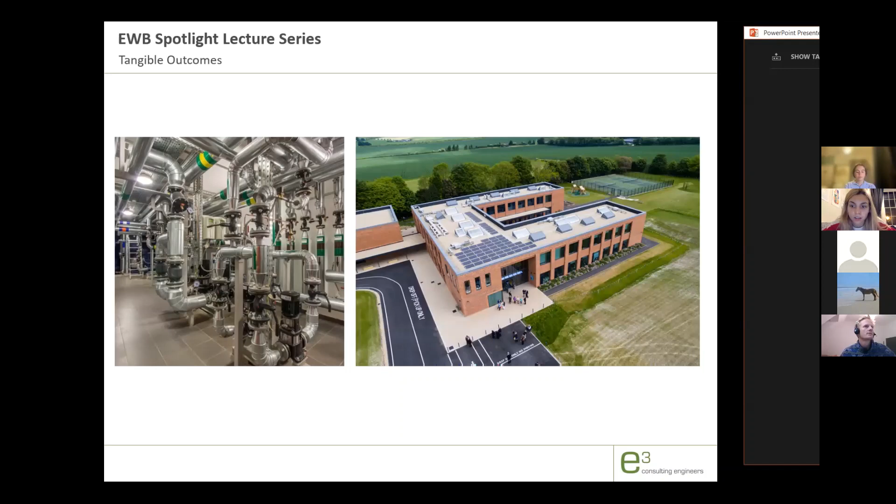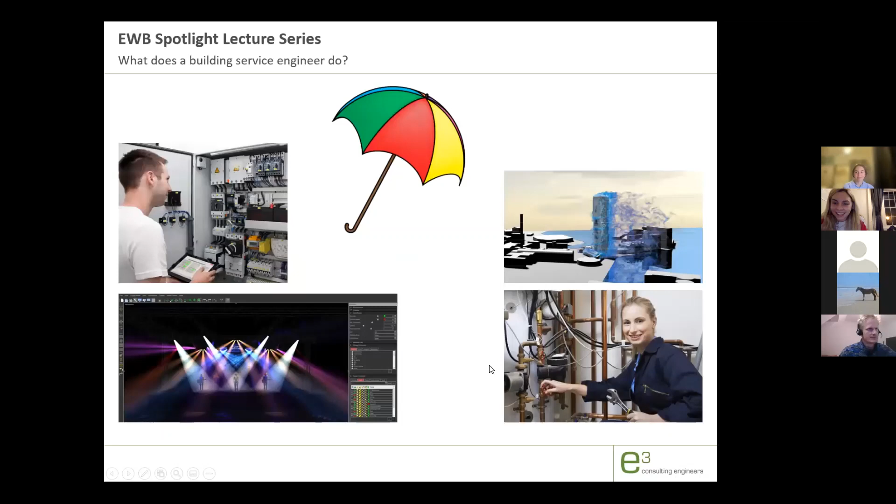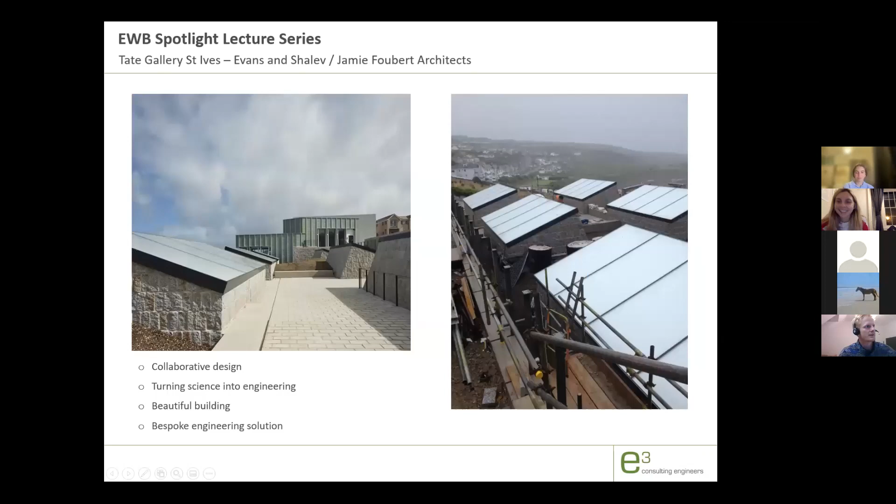All right, here we are, I think. Yeah. Right, fine. That's not going to ruin my flow at all, is it?

So the magical light. So what does that mean? It's heavily in the briefing process for the building. It's often mentioned by locals in the area. It's mentioned by tourists and probably by most people who travel there. They come back talking about this natural magical quality of the light.

And I suppose I felt it. I'm not that cold of an engineer that I would see something like that and just think of it in numerical terms. But at the same time, working on the project and being an engineer, I did want to put some sort of logic to it or tangible phenomena to it.

So my thoughts are that it's because of the wide horizons that you get down there. It's got sea on the north, the east, and the west of it. There's plenty of weather as well. So as well as seeing a lot of the sky and a lot of the sun, it's right down the southwest of Cornwall, so you get a lot of weather rolling off the Atlantic. So you get a lot of the sun peeking out from behind the clouds and going into the clouds and that sort of stuff.

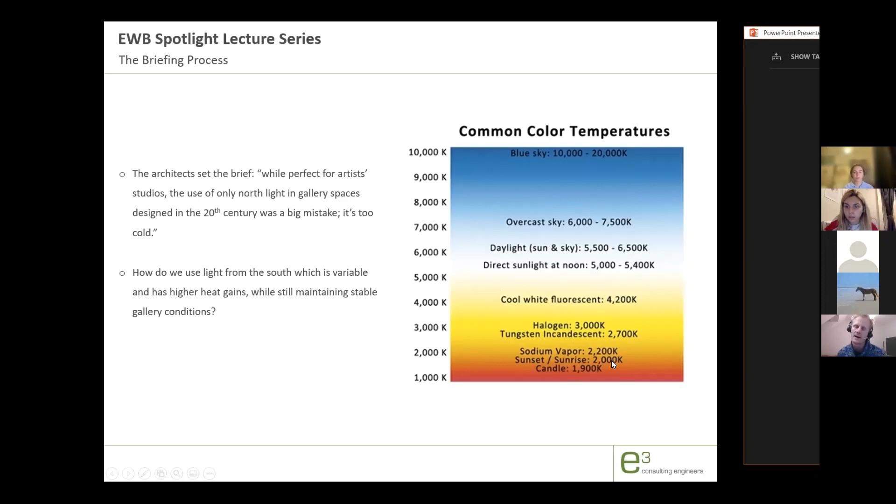And then down here, you get these warmer color temperatures. So direct sunlight at noon is kind of white. But then at either side of noon, you get into this warmer area. So sunset and sunrise is down here in the orangey-reddy bit, which is 2000 Kelvin; Kelvin is the unit they use for color temperature.

But okay, so I'm trying to set the scene here for how important it was to get this quantity of natural light within the space. But on top of that, there were all sorts of other things. So you needed to limit exposure to a certain amount of lux, and that's the light intensity. And then also to look at art well, you need good uniformity, so no bits where it's really bright and really dark, and then all the other building performance stuff like low heat loss, low air infiltration, and aesthetics.

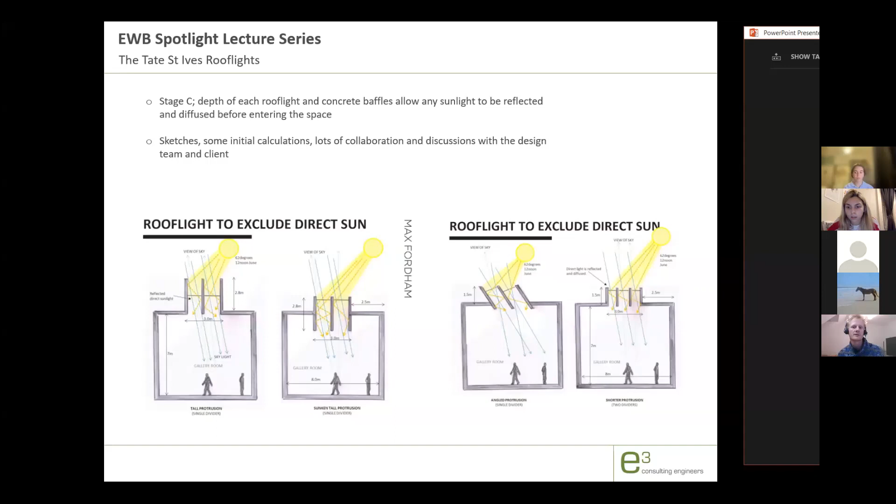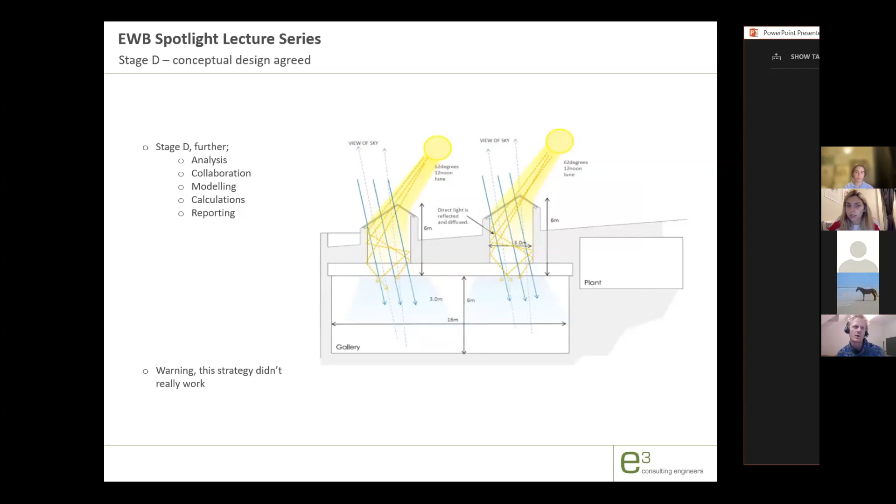One more thing, so this was another one of our roles, I suppose, is being able to communicate the results of our really quite complicated analysis using our simulation models and our computer models, but being able to communicate it in a way that people will understand it. So this was quite a powerful presentation. I thought it's got a bit of everything here. This isn't actually a photo. This is a render from our computer models, and these are the results from the computer models. This isn't actually the Tate. This is the Hayward Gallery in London, but just pretend it is.

And the Hayward Gallery has these triangular roof lights, and the problem that we wanted to solve here was how much shading can we have within these triangular roof lights, or how much light can we let in but not get light on the walls again. So here we've got a kind of optimization process. So here, as you can see, we've taken the shades down from the top a certain amount, and okay, it's quite nice and bright in there, and there's definitely not any direct sunlight on the wall, but we can probably go a bit further. So we go a bit further, and it opens up, and as you can see, we're really close to getting sunlight on the wall, but we don't have it.

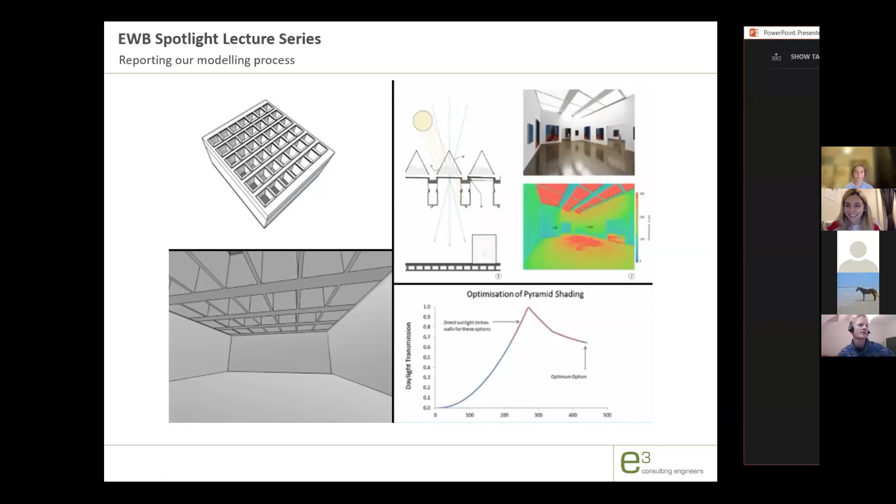I hope that happened at the right time, Ellie, or was there a lag? It did. All right, cool. Very good. All right. We'll get onto carbon soon, maybe.

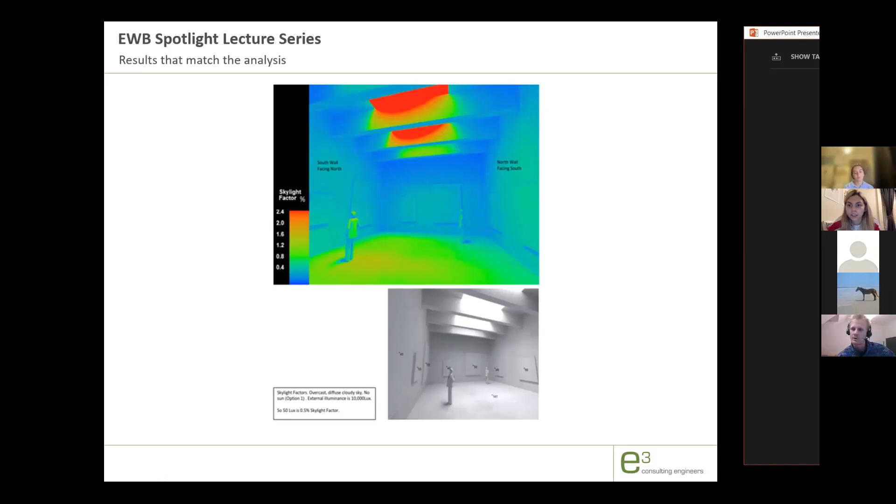Yeah, this is just a slide to say that this is the results from our computer modeling. This was then taken from our report, and the measured light output on the walls was within 1 to 3% of our computer modeling. So that was, again, another success out of the process, and good fun as well, because it was an opportunity for the people doing the modeling to actually go on site and make sure that their modeling technique is relevant or accurate to real life situations, which it was.

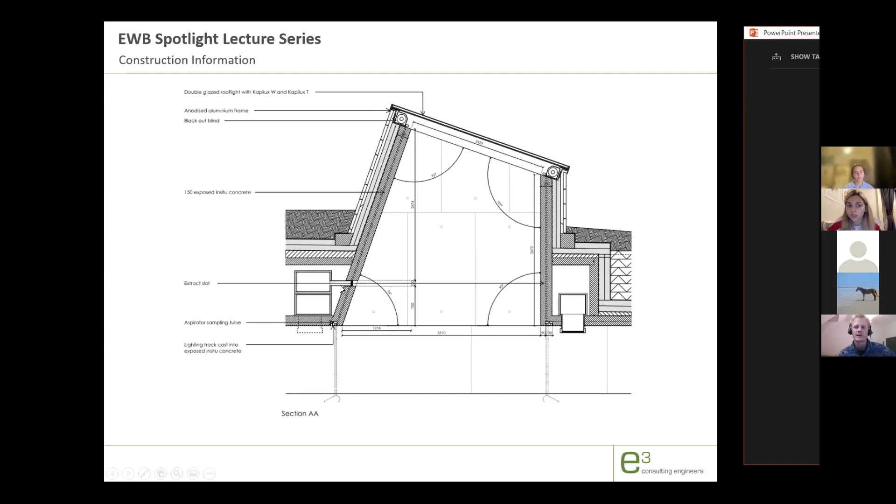This is an example of some construction information. It's not actually an engineering drawing, this is an architectural drawing, but the parameters in this architectural drawing are set by us. So all of those dimensions, all of those angles and everything come out of our modeling process. Also, these things here are the ducts that are pushing the air into the space and also taking away the stale air from the space too. So that's another part of what we do, obviously. And then this is what it looked like inside. I mean, it was a really, really impressive building. I mean, it still is.

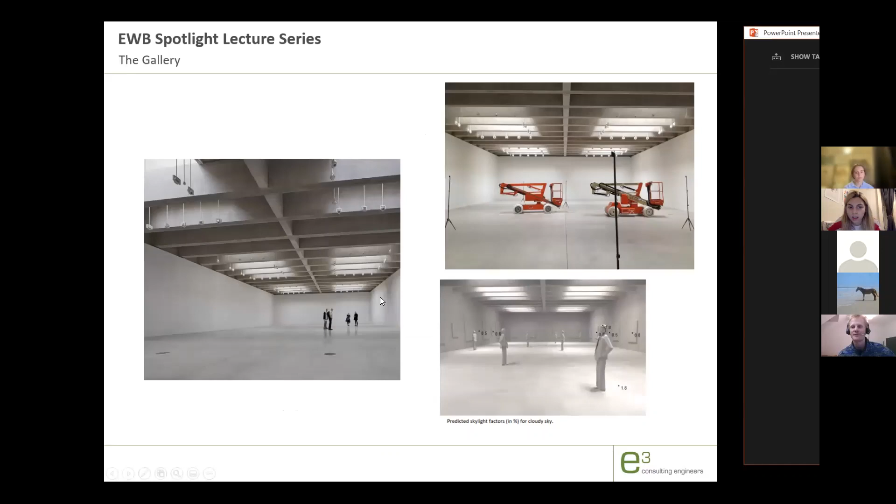It's going to be there for years and years and years. It's very solidly built. And again, look, a proof of our modeling being quite close to real life. They're very, very similar there. This is another picture, and this is what they look like from the outside. Again, quite impactful kind of structural and architectural design that we led.

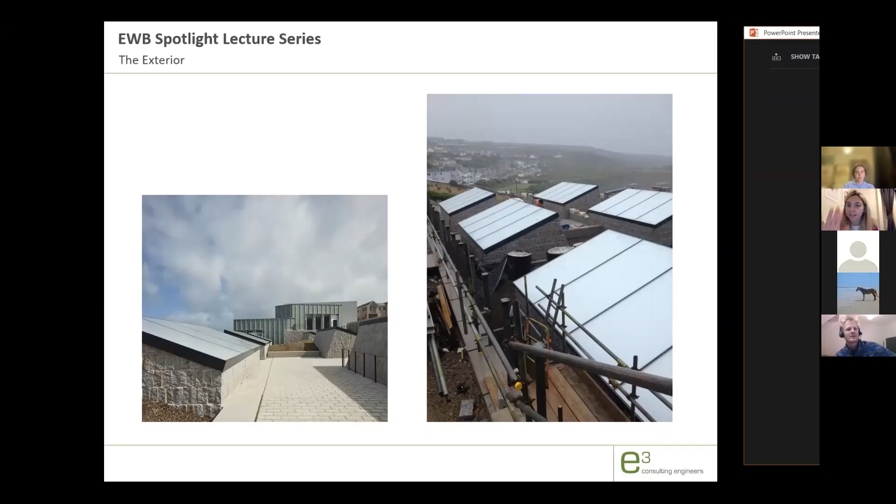We led the team, but also, getting it to look as nice as that is certainly something that an architect can do, and not me or most of the engineers that I know. Not quite as aesthetically astute as architects. And then just finally on this, good. Nice.

This is feedback from one of the architectural critics of The Guardian, Ollie Wainwright, who said, environmental engineers Max Fordham modelled the precise lux levels allowed by international standards for the display of art, from which the architects generated their form, designing 6 light wells 4 meters deep, topped with honeycomb filled glass.

So that was kind of the outcome of a, I don't know, 1.5-year design process. And of course we were working on other stuff at the same time, but that's a nice piece of work that shows what kind of work you'd be doing as part of a team. A very sort of environmental design driven.

So then what do I do? That's what you could be doing as a building services consultant or engineer. But what do I do? And what appeals to me? So there's 2 reasons. There's the decarbonisation aspect, but also the human aspect of engineering that I really enjoy. So success for us isn't a beam not failing or a component being lighter or cheaper. Success for us is an internal environment that is comfortable for its human occupants.

So it's designing windows that are placed to let light in, provide views, or open wide enough to allow enough air in summer, but don't let excessive heat out in winter and don't let too much in summer. It could be designing ventilation systems that control humidity, CO2 concentrations, indoor air quality, drafts and temperatures to allow optimum conditions for kids learning in a classroom. And it could also be designing heating or mechanical systems that reduce energy use.

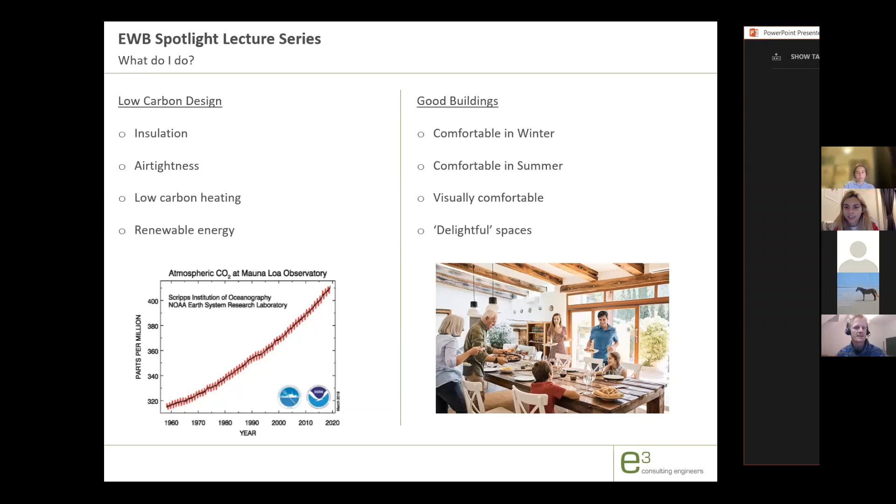but I have blown up that concentration of CO2 in the atmosphere, which is a scary graph. It's not a very nice graph at all. It shows from the 60s to now the concentration of CO2 in our atmosphere increasing by about 1/3. We're currently at about 420 parts per million, and that's the highest that's ever been recorded during the whole evolution of

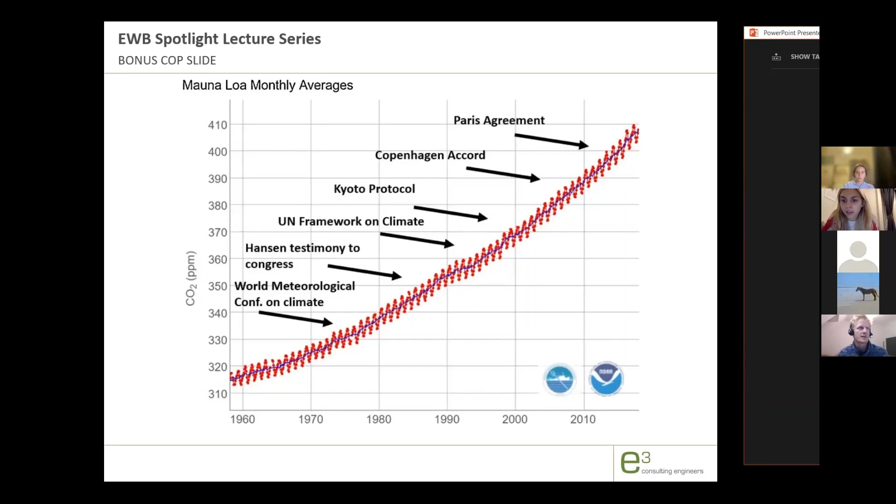meetings to talk about climate change and carbon emissions. And as you can see, they're not really having much of a dent on that upward trajectory. So to go with the bonus COP slide, there's the bonus climate anxiety slide as well. One that I fall prey to often.

So there's all these horrible things that are happening as well. Insects collapsing, extreme weather in warm places, and humans driving species to extinction, which is horrible. All that other stuff. And the center of that is that carbon dioxide emissions are set for the second biggest increase in history for 2021. And 2022 is probably going to be similar.

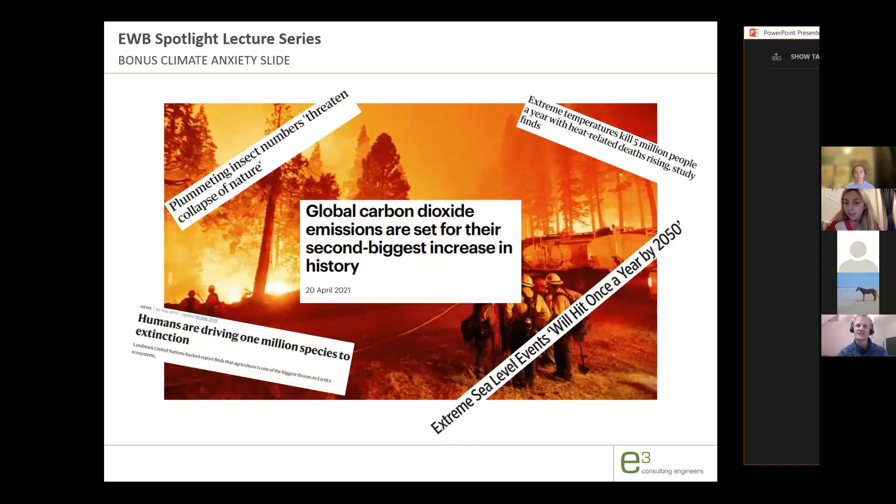So although I've given you a big old talk about the fun part of building services engineering, my day-to-day these days is more focused on emissions. My private life is too, but the bigger focus for me now is reducing the 23% of the UK's emissions. Sorry, that wasn't very clear. Currently, buildings, if you include the electricity used within buildings, take up 23% of the UK's carbon emissions.

And that's kind of crazy, because we've got the technologies and we've got prototype buildings already built and already refurbished as well of our existing housing stock that is very, very close to zero carbon. And some of them are, I suppose, mini power stations, as in they generate more electricity than they use.

So this is a graph from the CCC, the Committee on Climate Change. They have really, really good reports and information. They're an impartial governmental advisory body. And they basically comment on how we're doing in terms of our road to net zero carbon in 2050 and those interim targets that we also have.

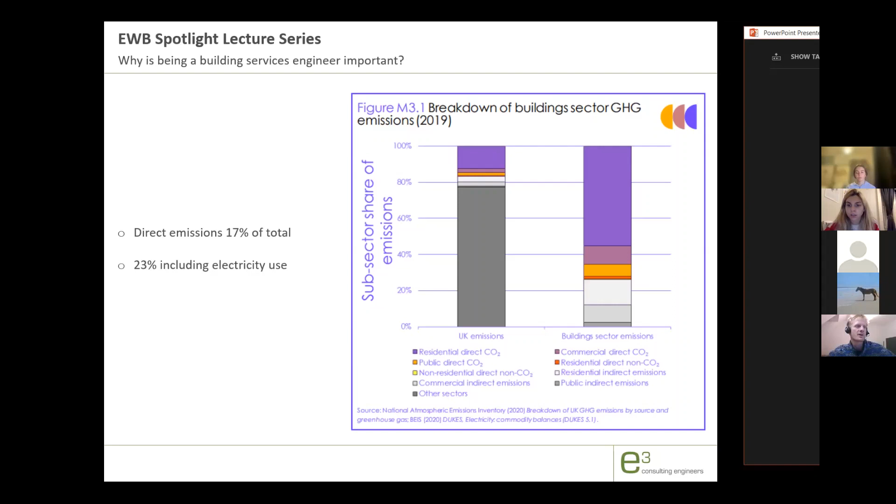So what this means is there are headlines that say we have reduced our carbon emissions by 40% since 1990 emission rates, but really that's just been due to the phase out of coal and it being replaced by wind and solar, and also us exporting the emissions for the manufacture of quite a lot of our consumable goods, going to Asia generally.

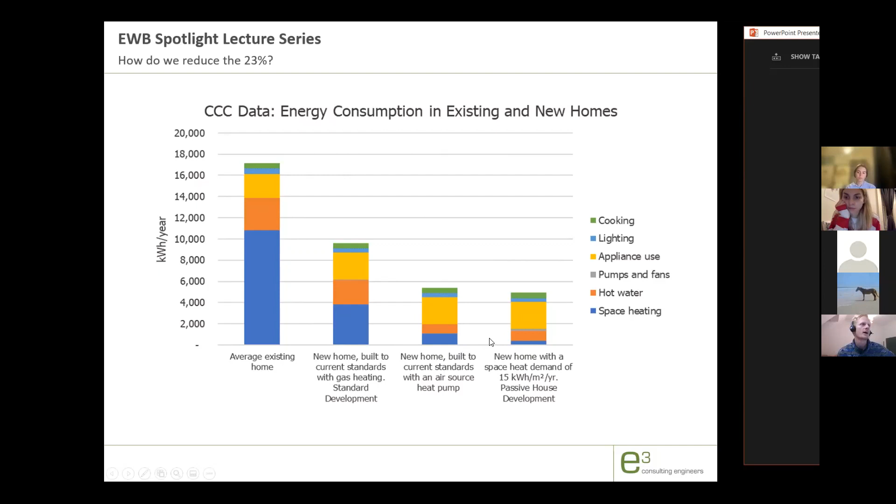So if you look at what you've done to the blue bit, the space heating, by having a Passivhaus, you've thirded a new build with an air source heat pump. So it's an enormous factor of reduction when you're comparing it to an average home, a new build with a gas boiler, or a new build with an air source heat pump. And so that brings me nicely onto Passivhaus.

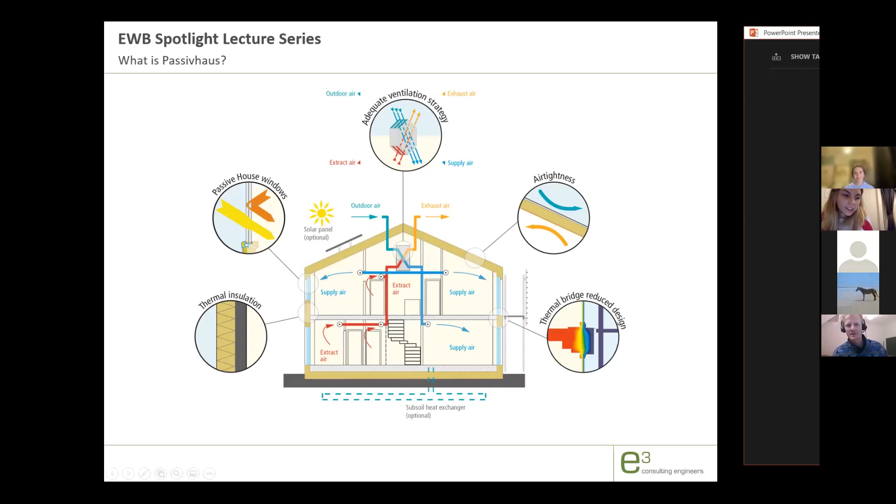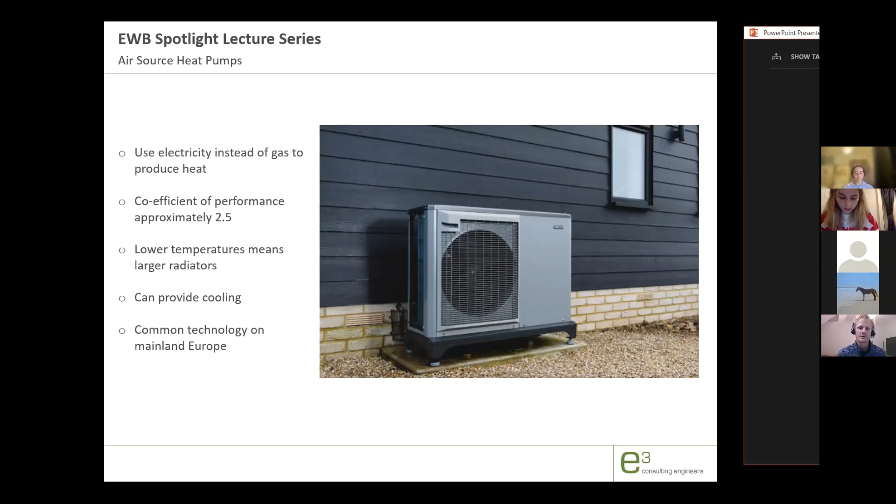And that's really, really important, because, let me just go two more slides and then we can do some questions, because with this air source heat pump, you end up being able to link everything together. So if you've electrified everything, so you don't have gas, then you've got the potential to have your PV array that goes into a battery that might go into your car, that might go into heating your home. So you have this link around your house where you can then reduce not only your emissions from heating your house and having showers, you can reduce your transport emissions, because you could charge your electric car, or you could

charge your electric bike. Part of that is that you could charge your battery during the day when it's either windy or sunny, or both. And then in the evening, when it's not sunny, you can then either use that stored electricity from the battery yourself, or you could push it to the grid. So it means that your neighbor is using low carbon electricity instead of using higher carbon electricity.

I've still got some gas for some questions, but yeah, sorry that was rambly. That's kind of how my presentations roll. No, not at all. Thank you so much, Dave. Are we okay to go with some questions? Yeah, do it. Fab. Does anybody have any questions? Do you want to unmute or put your hand up?

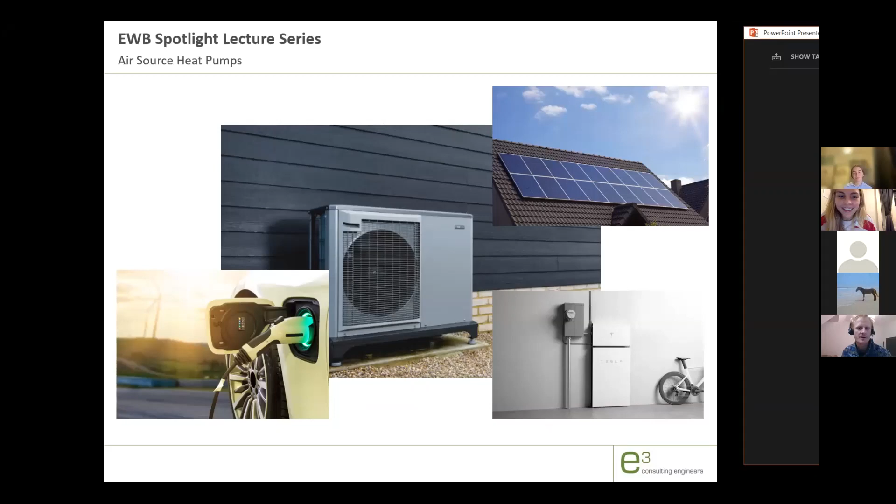Yeah. I realize I've done my hour. I will not be offended if people start dropping off. It is Monday, you can have too much learning for a Monday. But let me just go back to this slide if that will help, because moving through slides has been such a smooth process so far. Come on. Oh no. It's getting there. Okay. Well, while that sorts itself out,

every house has a kitchen and at least one bathroom. It's a legal requirement to extract the air from a kitchen and a bathroom because it's stale and it's got high humidity, and that is unhealthy for both the occupants and the building fabric, so what makes up the building. So that air needs to be taken from the room it's in and pushed outside. Traditionally, that might just be an extract fan, and then the air comes from the front door or the windows or something like that.

But what an MVHR does is it recovers the heat from that outgoing air and passes the heat to the incoming air, and then you supply that incoming air to a bedroom or a living room. That means you get a constant supply of filtered air going into the rooms where you want it, so your bedroom while you're sleeping, or your living room while you're watching a film.